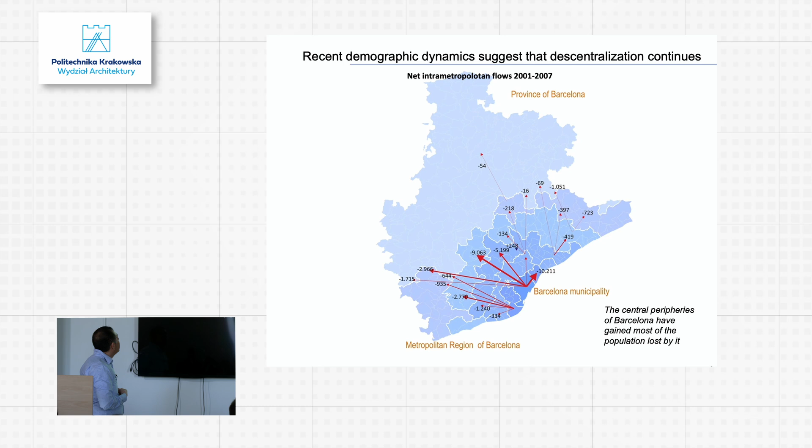And here is how people living in these peripheral areas commute to work in Barcelona. In total, more or less 16 million people move around in a day. That means people living in the metropolitan region move at least 3 times per day — if we have 5 million people living there, at least they move 3 times.

Basically, half of the mobility is produced by walking, namely in the city center and subcenters, while the other part is by public transportation and car traffic systems. Here you have the shares, but the important thing is that the modes of transportation are completely different considering the urban fabric: dense, diverse and mixed in the center, versus the periphery which is low density, monofunctional, and basically served by cars, as you can see here. The ratio shown is the number of people moving by active or public transportation against the private car.

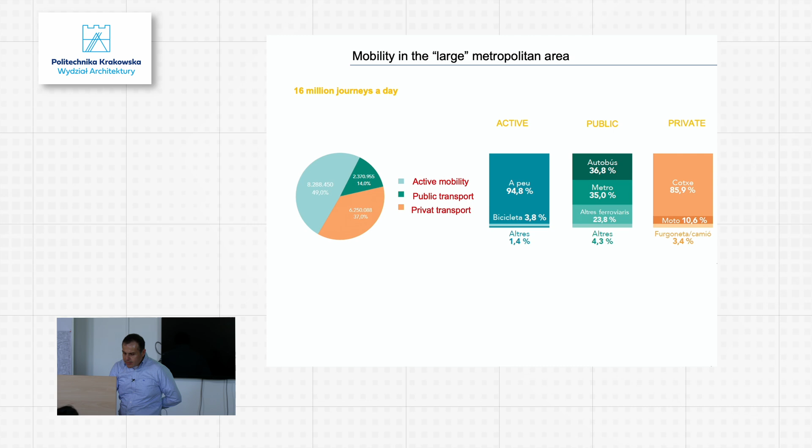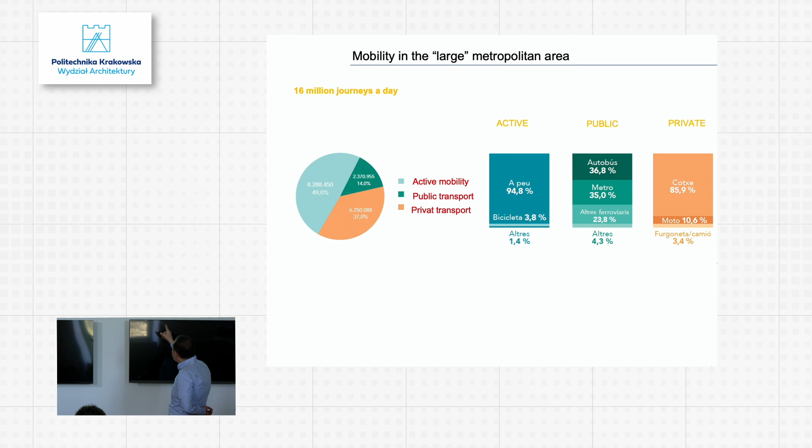The result is that all people living outside of the city but working in the city, despite the share not being too large, collapse the whole urban structure. All the main avenues and highways entering into the city center, the metropolitan center, which is not only the municipality of Barcelona but also the neighboring municipalities at the same level of the sea in a continuous urban fabric, suffer traffic jams. The pollution produced by cars is a large problem within Barcelona.

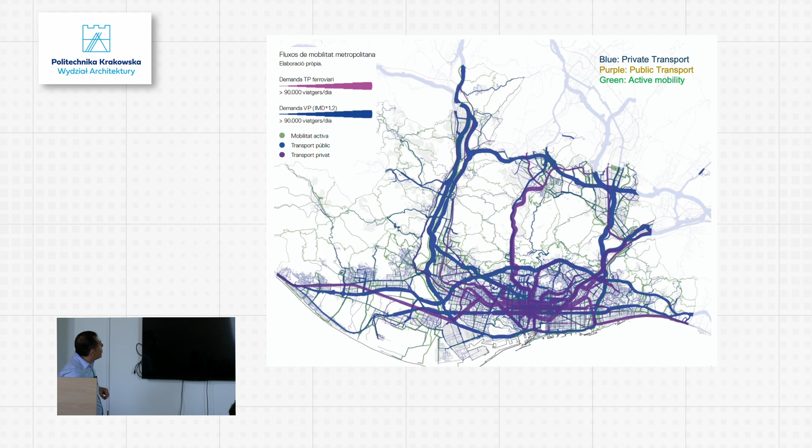Not surprisingly, especially during winter when the air is cold, we have these problems of contamination, and Barcelona is considered one of the most polluted cities, not only in Spain but also in Europe.

Another policy is the introduction of bike lanes over the last 15 years, which has increased the network of bike lanes in the city, and the share of mobility using bikes, but also personal mobility devices such as scooters.

Another policy consists of changing the geometry of the bus network to produce a more orthogonal pattern, which is closely related, as we will learn, to traffic pacification. And of course, integrating the tariff system in the city to allow more easy and attractive mobility, and digitizing everything with information systems.

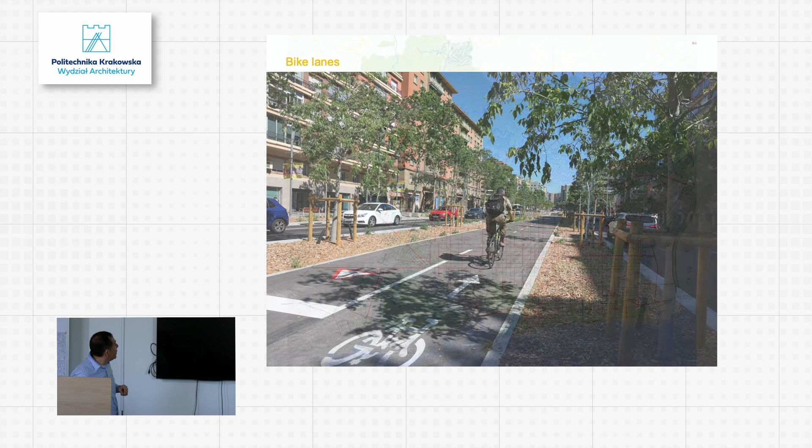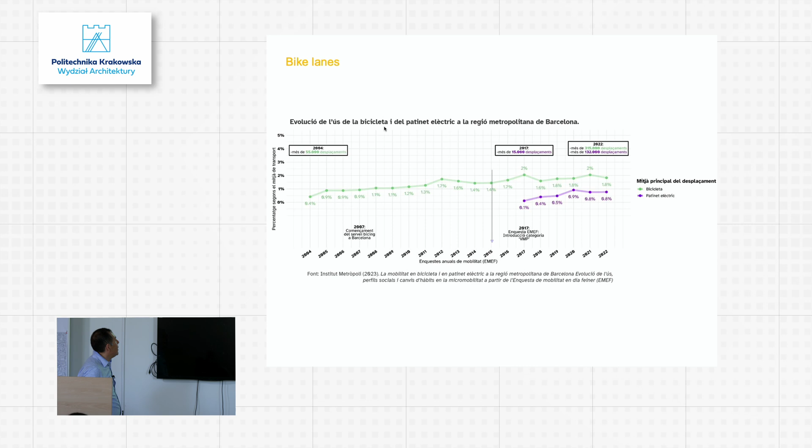So urbanists - well, all those actions are actions by engineers, basically. But urbanists, land planners, city planners, and architects are also contributing to change this situation. Today's lecture focuses precisely on how architects are also helping to transform this terrible situation of a city that is congested by people living outside of it.

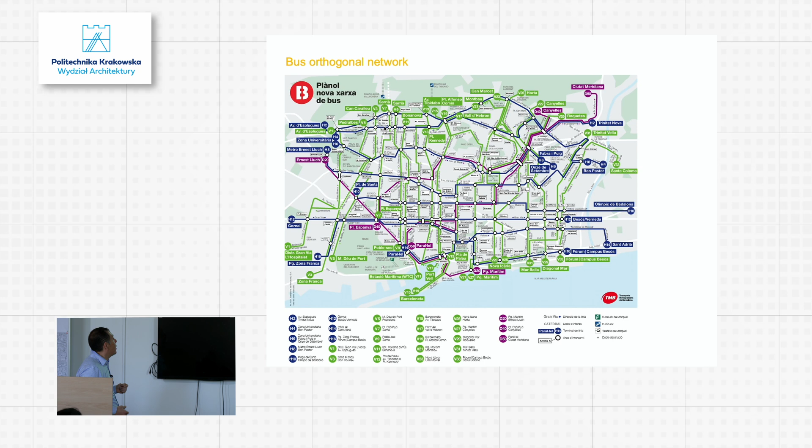People living within the city live in a fantasy, a kind of Disneyland, they can walk. But people coming to work in the city necessarily use the car, because public transportation, as you have learned, is very weak. So we're going to start by remembering where Barcelona is coming from, going through the different policies that urban planners are introducing, and finally pointing out the most important things.

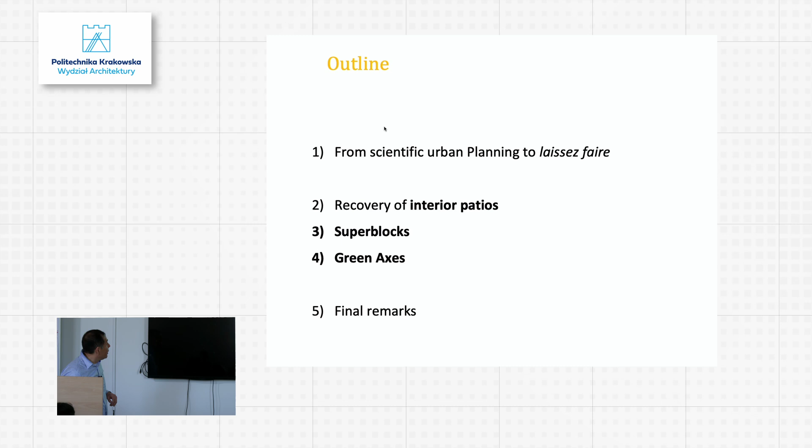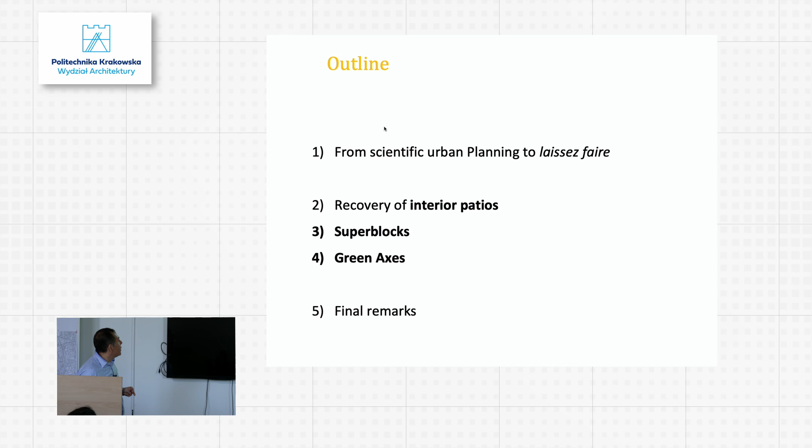Maybe you are aware that Barcelona was one of the first cities planned according to scientific criteria, basically analyzing what was happening in the old walled city in order to design what would happen in the extension of the city during the Industrial Revolution. Ildefons Cerdà, who was not an architect but an engineer, a road engineer, was the author of this enlargement of Barcelona. He analyzed mortality by type of street, basically the width of streets, to put into relation the health condition of people with the health condition according to the buildings.

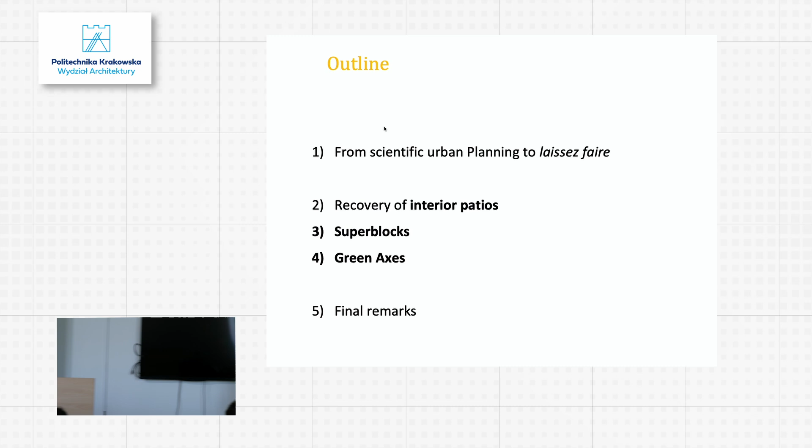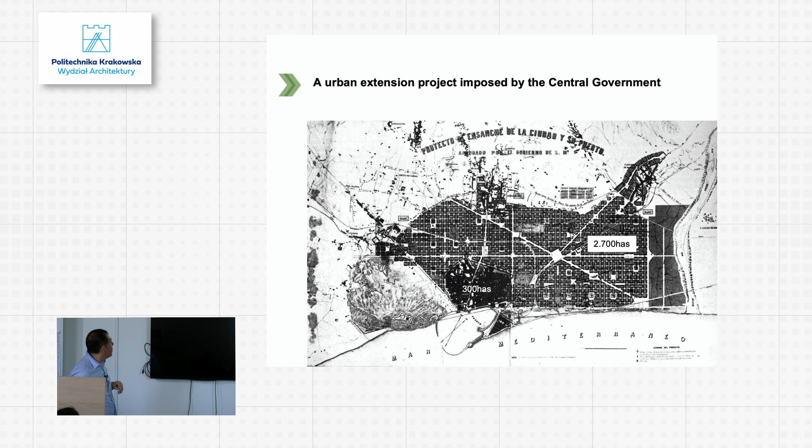Departing from the design of an ideal multifamily home, he designed the block that would be ideal for the city, and also considered that part of the block should be devoted to green spaces that were not necessarily public, but private, containing some orchards and some of what we now call urban agriculture. So not all of them were ornamental.

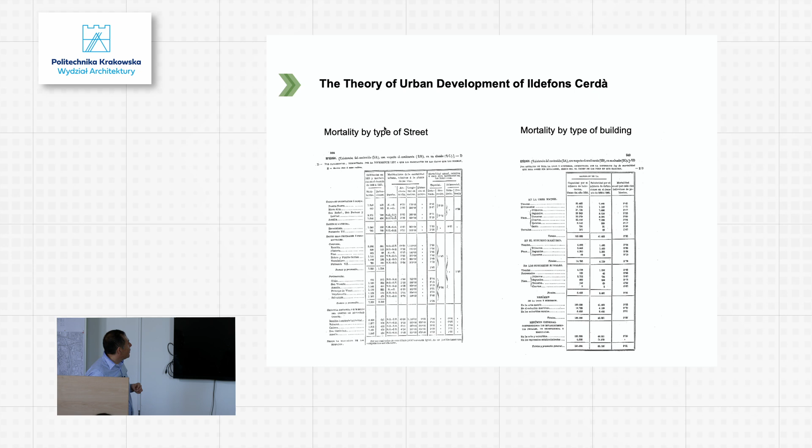The resulting layout from this idea of having such blocks, and devoting most of the private land to greenery, is the image you have here in this reproduction. By having these octagonal blocks, when they match one to the other, it also allows for easing the traffic of road networks.

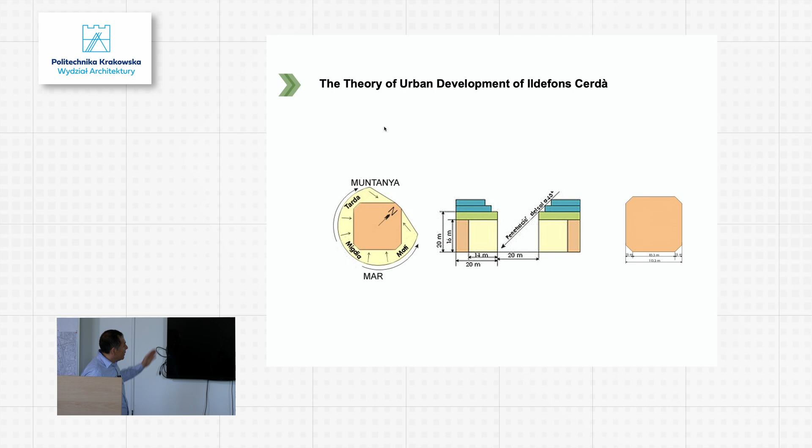Such as railroads or tramways at that time. Despite the tramways not being present before Barcelona was enlarged, the new fabric would allow them to circulate easily, and later, of course, the cars.

He figured out that at the center of these crossing points there would be some services, for example police stations, information stations, or kiosks to provide services to people. More or less, the image resulting from such ideas was this.

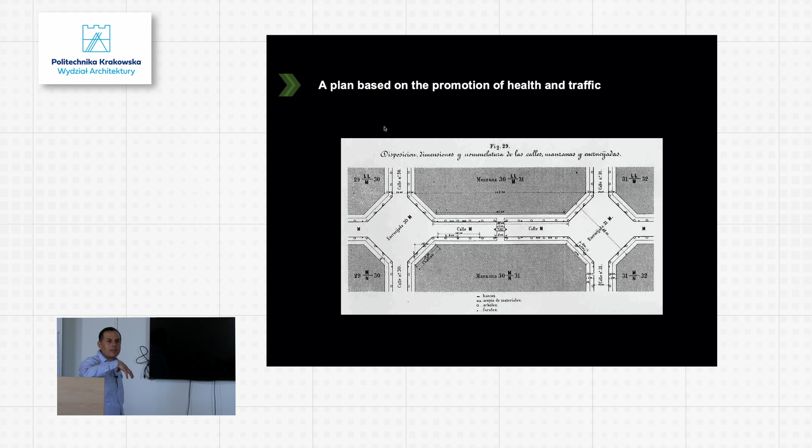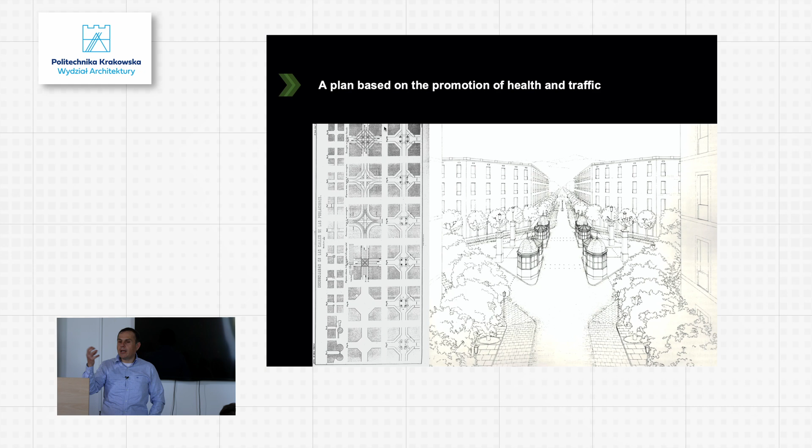Considering that Barcelona became a wealthy economic area since industrialization was happening, people from manufacturing industries were investing money in the real estate sector. The real estate sector was a new business, non-existent before in Barcelona, but it attracted capital from the revenues coming from the manufacturing area, and those revenues were used to build such heritage buildings.

However, it lasted only 80 years or less, because Spain entered into a civil conflict that produced a complete stagnation not only of Barcelona but the entire country. This industrial booming, which was occurring not only in Barcelona but also in other large Spanish cities, stopped.

The economy of Europe continued to grow, especially with the Marshall Plan, while the economy of Spain stagnated. So a kind of gap emerged. During that time, during what I call the dictatorial abyss, some of the regulations that were shaping the growth of Barcelona were relaxed.

However, in the 60s, Franco realized that Spain had to come again into the global economy at that time. So he produced a kind of stabilization plan to attract new, foreign investments, and it worked. So what happened is that the cities started to grow again. Here you have the growth of Barcelona.

This is the city of Barcelona, and this is the distance to the city of Barcelona. What you have here is the growth of population in time lapses of 10 years. You can see here this blue line, which is what happened between the 60s and the 75. That means a lot of people from other parts of Spain, namely the south, but also the center of Spain, came to live in the city.

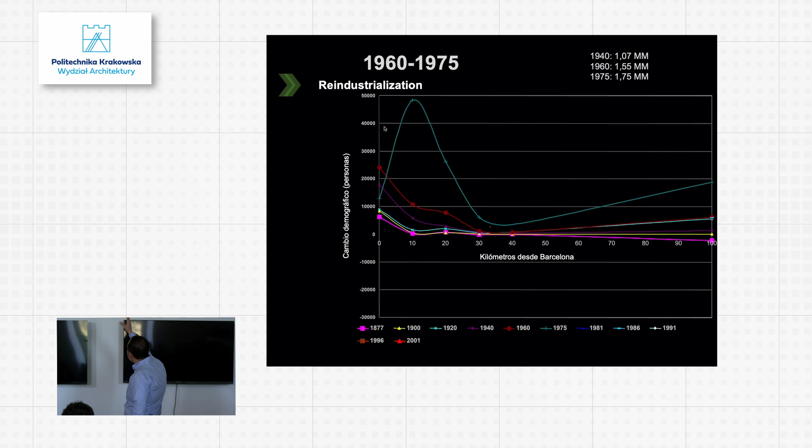Of course, the ensanche, the eixample of Cerdà, was not enough to provide housing for those people. So what happened is that under this laissez-faire approach from the dictatorial land management, it was allowed to grow the width of the buildings, to build on the four facades of the block, and also to construct new stories, as you can see here.

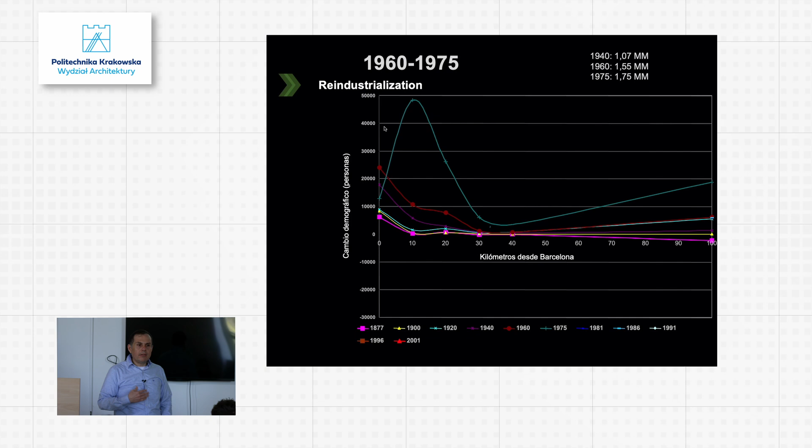At the end of the day, the built area grew more or less 5 times. So this paradise that Cerdà designed completely disappeared, and the result looks like this: a completely congested area with very, very poor greenery. Only some large parks remain, and the rest are basically streets with trees.

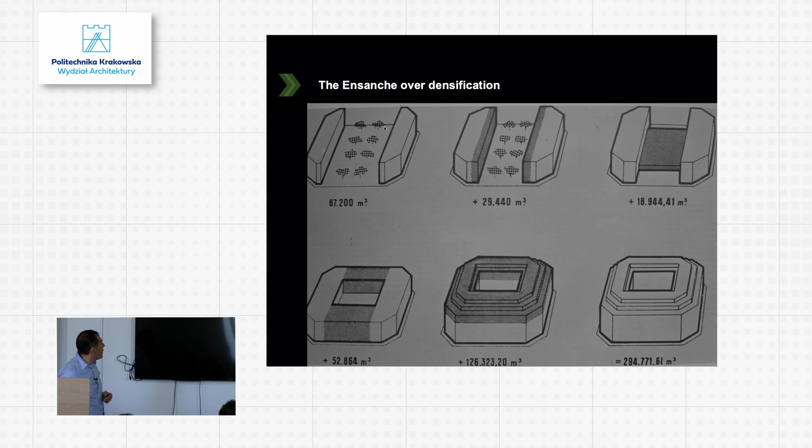However, not only was the Eixample built up, but also the peripheral areas, where the central government built housing estates that were in the middle of fields, completely disconnected from the cities, from the city center, from the main roads, and even lacking public space, facilities, and any kind of amenities.

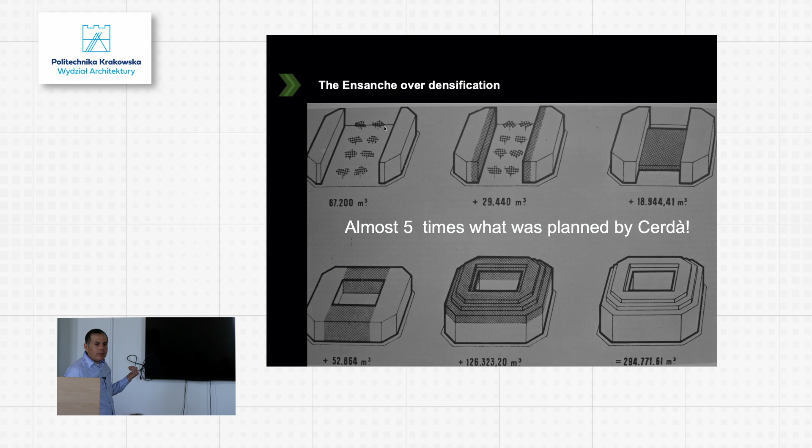So this Barcelona from modernism became something really different, and even shanties appeared on the outskirts of the city and even on the beaches.

This changed as Franco died, as the new democratic governments, namely the municipal governments, came to take control of the situation. Pascual Maragall, the city mayor of Barcelona, had the ambition to transform the city by attracting the Olympic Games. At that time, Spain was joining the European Union.

So it was the opportunity to join the power of the city with money coming from the European Union and also from the central government, because the politicians were aligned on the same, let's say, left-hand governments. The idea was to take advantage of the Olympic Games to transform the city, to refurbish the city center that was pretty congested, and also to provide an opportunity for the periphery to be integrated into the city.

So basically, taking advantage of the economic crisis that arrived in the mid-80s, they bought land that was private, sometimes derelict factories and manufacturing sites. These were bought by the city council and transformed into different kinds of parks.

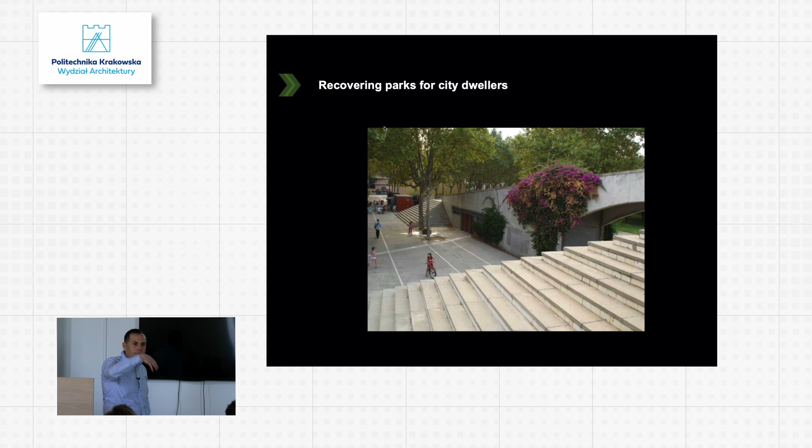First, Catalan migrants from other parts of Catalonia. Second, Spaniards who came to work in Barcelona. Third, foreigners who started to arrive in the 70s and 80s.

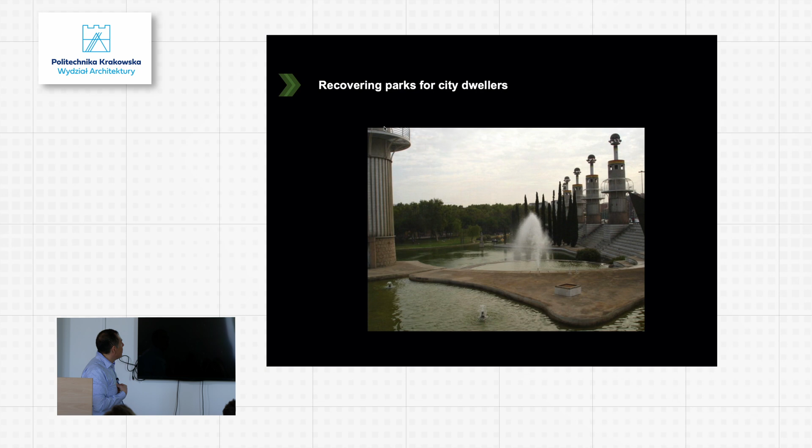So it was a pretty deprived area, and it was also regenerated because normal citizens started to fight to improve their city. This was not the original plan, but it happened according to demonstrations produced by the people.

New centralities also emerged in order to decongest the city. One of the landmarks of this transformation was the recovery of the seafront. Barcelona did not have access to the sea because all manufacturing plants were located along the coast, and basically the access to the sea was only 100 meters.

So what they did was produce a waterfront, remove the shanties, relocate people into social housing being built in other areas, and also produce artificial beaches. The construction of ports along the Catalan coast changed the flows of water, and this eroded the landscape, so all the beaches here in the city are artificial, protected with marine structures.

So for the first time ever, in 1992, when the Olympic Games finished, the city had access to the sea and new large public spaces that had not existed until that time.

However, after this success of the central city, the economy of Barcelona started to change. The manufacturing sector was moving to China and other places, on one hand. On the other, Barcelona became a touristic city. So what happened with this touristification is that home prices started to rise, and this decentralization of population to the outskirts started to emerge, producing the first images I explained.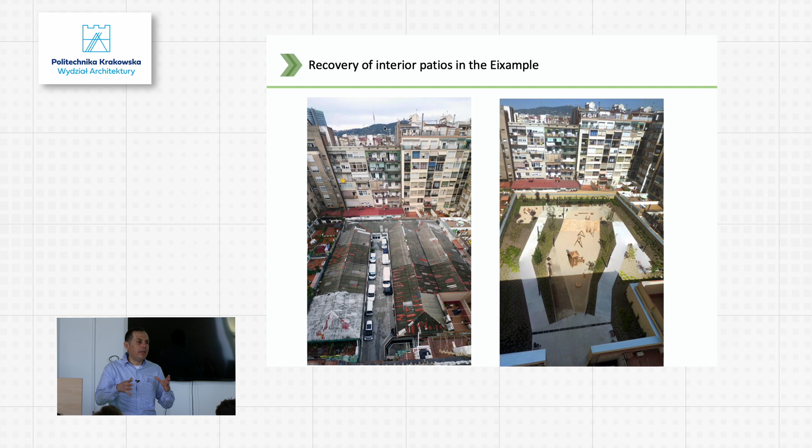The superblocks idea is not a new one in Barcelona because somehow since the 70s, when they started to recover the area across and along the cathedral and the city center, the idea emerged to produce some islands for pedestrians, areas where basically cars cannot access, only service cars. However, what is new in Barcelona is to produce a massive plan to expand this idea, not only to the places where historical buildings are placed, but to all the city.

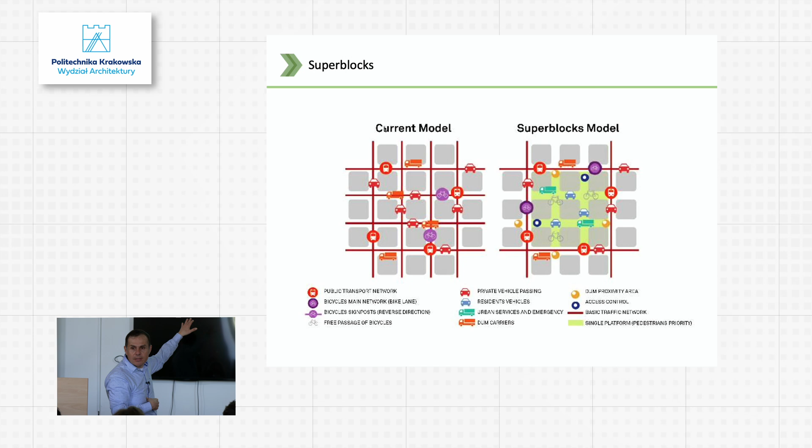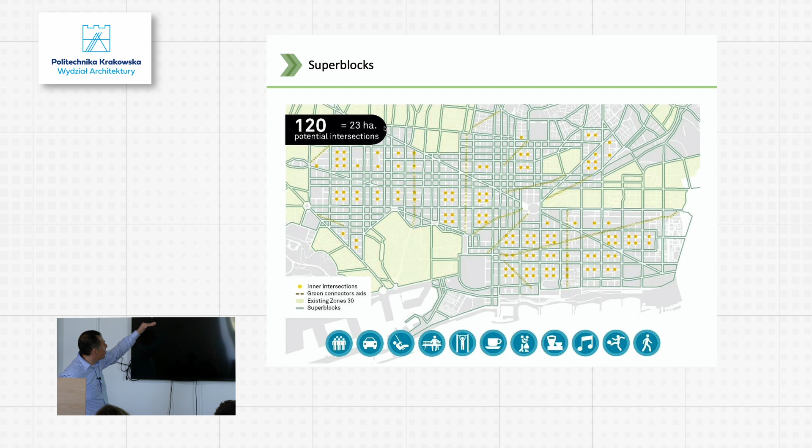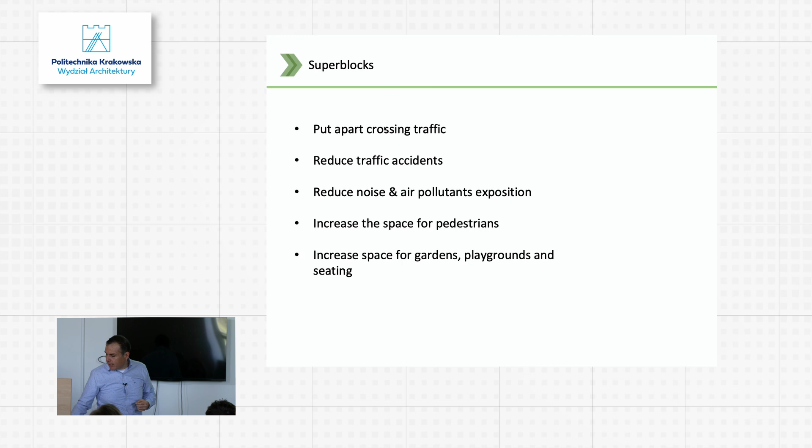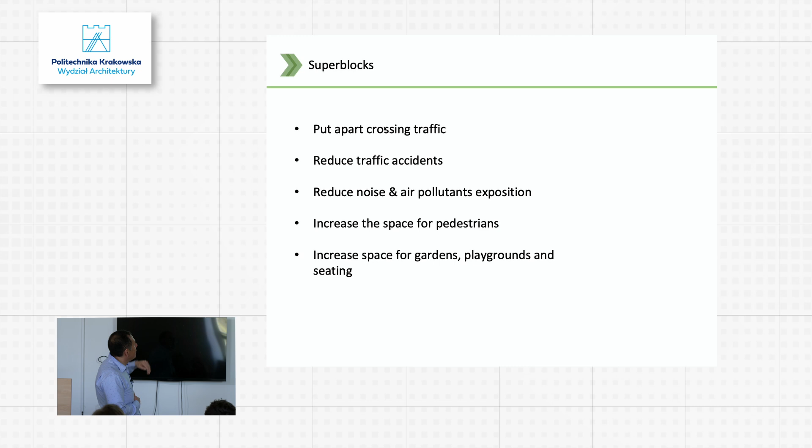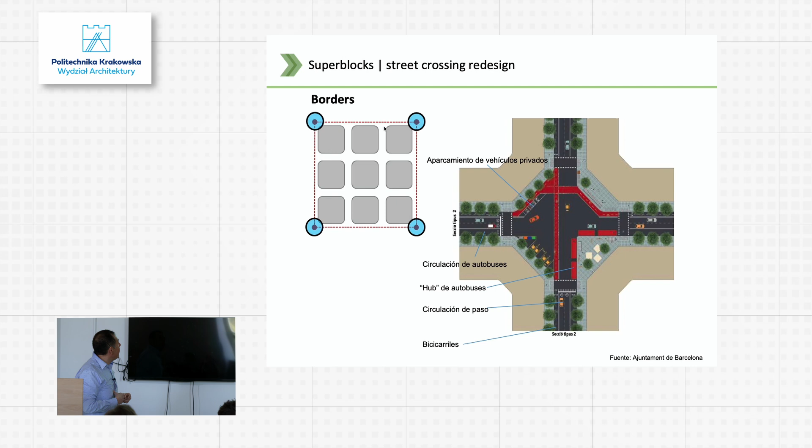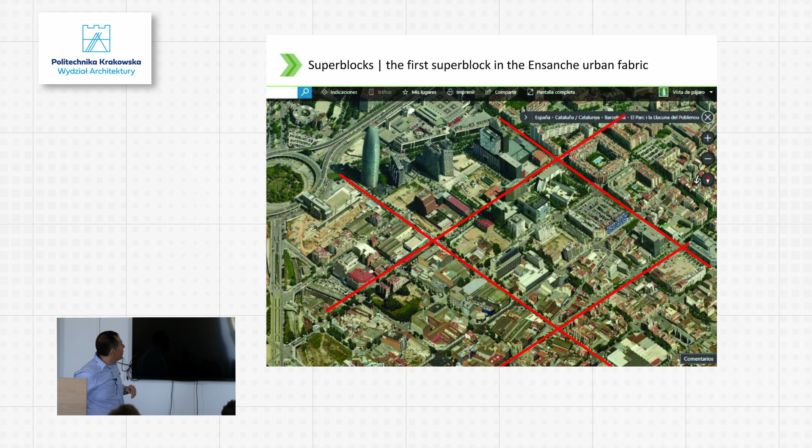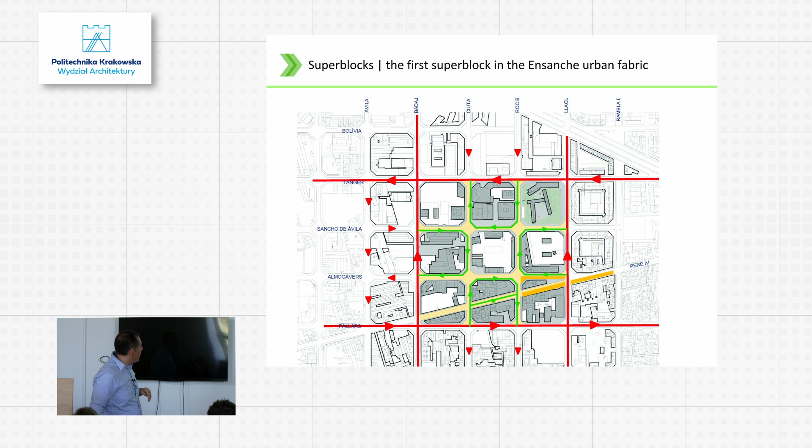And here you have some of the results. Using tactical urbanism, very cheap, they only spent 50,000 euros, which is nothing for the budget of the city. At the end of the day, since they were making experiments and changing furniture, or for example redoing the streets, they totally spent 100,000 euros, the double of the original budget. But anyhow, they saw how the superblock was working.

Interestingly, the people living there protested against this policy. This policy, intended to provide more public space and a more peaceful traffic landscape, was not 100% accepted by the people living there. One of the main reasons was that these people used the car to go to work, and instead of having direct access to the main roads, they had to make a roundabout that perhaps enlarged their journey by 2 minutes, but this was enough to make the people protest against the policy.

But also firms, commercial firms, namely workshops that were very well present in this industrial area, protested against the city council, because they understood that this traffic reorganization would reduce the exposure of their firms to people crossing by, and their revenues would be reduced.

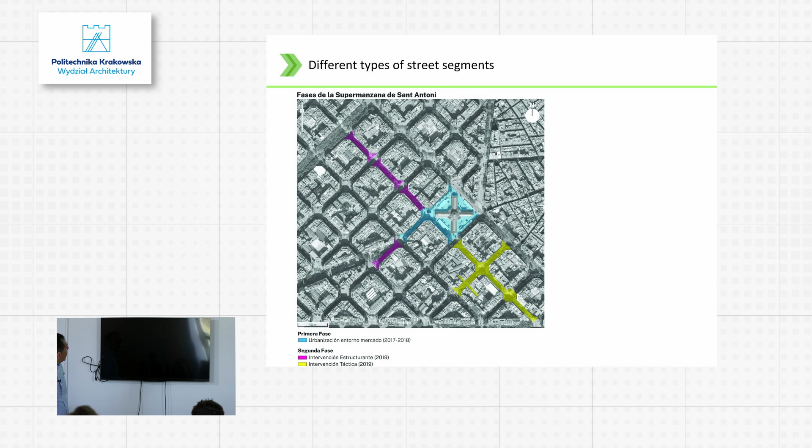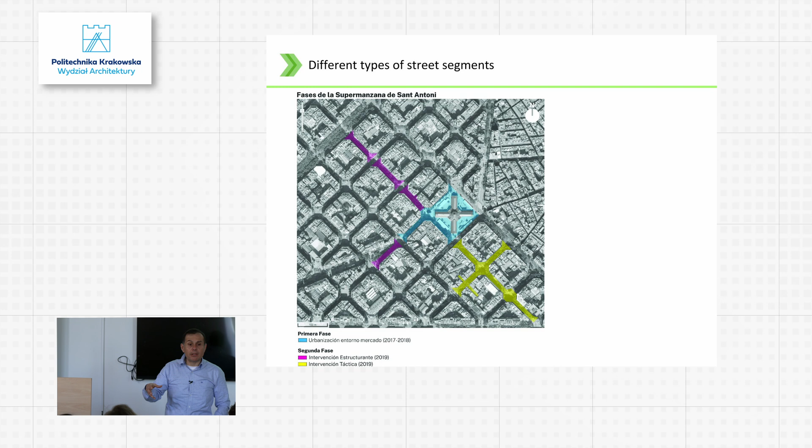Another example of this superblock policy happened in the very heart of the Eixample of Cerdà, the extension of Barcelona, around the neighborhood of Sant Antoni, which has a market. During the 19th century, along Europe, there was a strong movement to provide decentralized markets to European cities, and Barcelona was not the exception, so almost each neighborhood has a market. This market, which is also a landmark, has been recently refurbished. This renewal, one of the first to use the new technology of steel in the city, was taken as an opportunity to also regenerate the area around it.

As you can see here, the streets are almost erased, you don't distinguish which is the area for the cars and which is the area for pedestrians, because it's a unique platform providing uniform access to people and service cars.

The market refurbishment itself is quite interesting, because basically they have enlarged the commercial capacity by constructing a subterranean area, under the ground level. This underground level is the spot for supermarkets. So in the main, historical building, there are some stalls for small shops, where the price is very high and the products are really high quality, while people buy their groceries in the supermarkets downstairs.

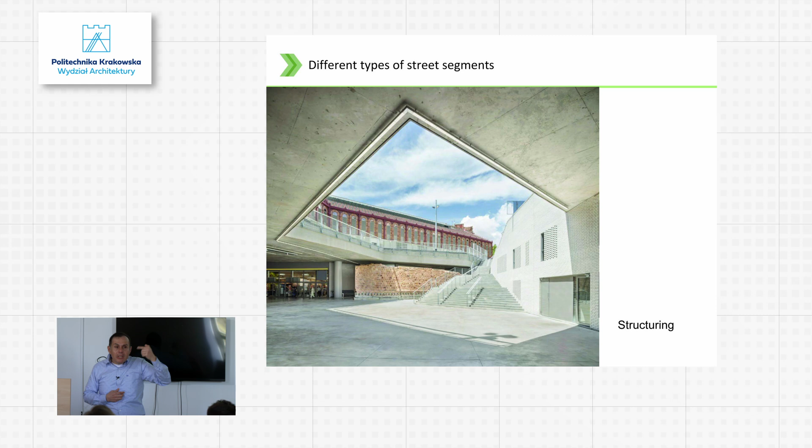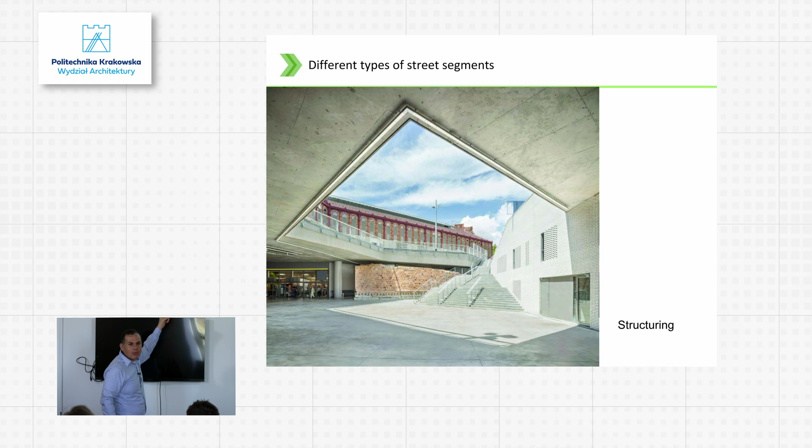But this is a nice intervention, because when they were building this supermarket, in order to get the money to refurbish the heritage building, they had to build this supermarket. When they were building this, they discovered one of the medieval walls of the city, which is now shown here in this image.

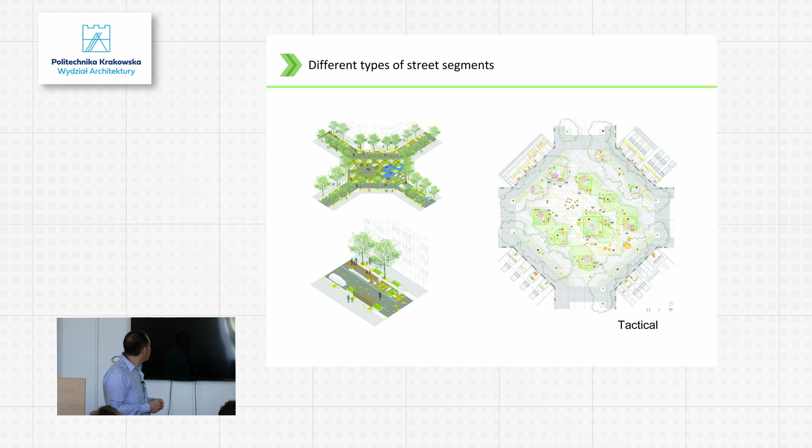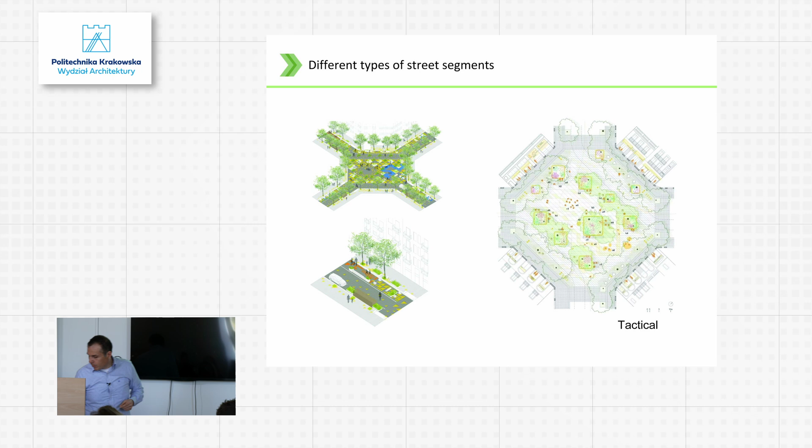The idea of the superblock of Sant Antoni was to produce two kinds of interventions. One that is more hard, where a lot of money was invested to produce a uniform platform with permanent urban design, and the other using tactical urbanism, meaning soft interventions with painting and light furniture that can even be moved, not fixed with concrete. This is the tactical area's original design, and this is the result.

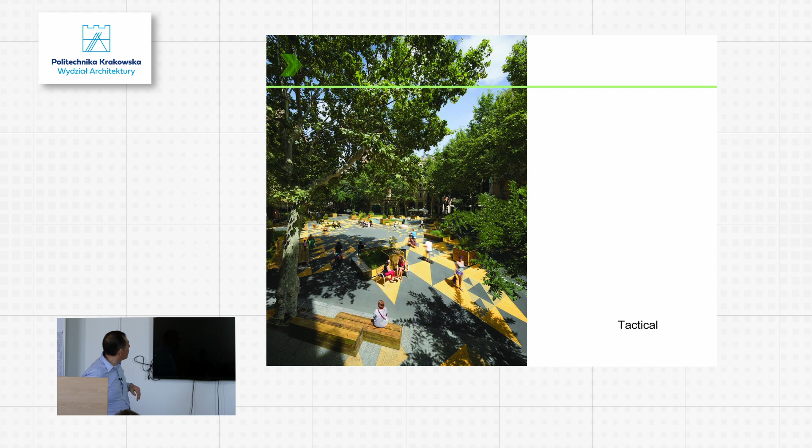This is the center where the original streets were crossing, and it's the spot to sit in the public space, an area for gathering people. Those tables allow people to play, smoke, or drink, since this is also a low-cost drinking area. In the groceries around, students basically buy the beer, then come here and pay half of what they'd pay in the bars, which of course has populated the area.

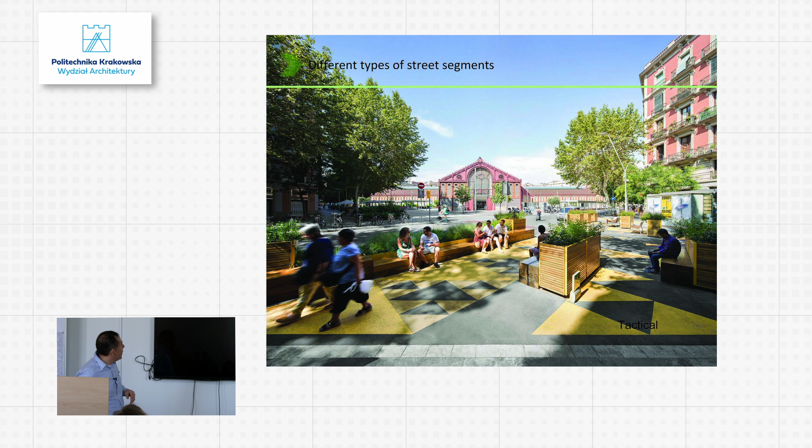Here you have another image. In this area, the people—because we have surveyed those living around here—are not 100% happy. Why?

Because of three facts. First, this is a really attractive area, so people from other neighborhoods come here to use the public space, and local residents aren't happy having strangers in their place. Secondly, they feel it pollutes the space and makes noise—when people chat in public, especially in Spain where we speak loudly, neighbors feel their peace is disrupted.

Thirdly, very fancy, nice bars have appeared, but they're displacing the local shops. Traditional shops can't pay the rent that bars can afford, so there's a kind of gentrification of the business at ground level. For those reasons, people are not happy.

But also they're not happy because those benches are used by homeless people at night—this becomes a place where they can come and sleep. So people now have new activities that weren't present originally, which is quite amazing given the original quality of the public space.

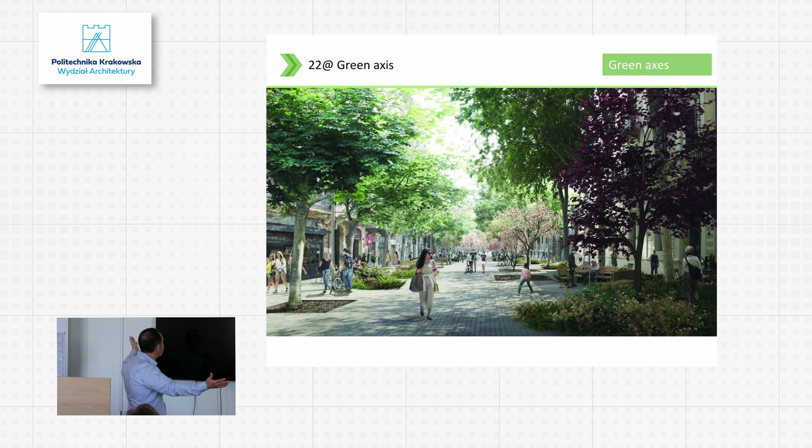Secondly, we introduce hard urbanism—urban design to create new greenery, plant new trees, and create circulation areas for people, along with small islands where people can sit, gather, and meet. This also allows businesses to extend into the public space—shops can put out stalls, groceries and fruit shops can display goods, and bars can set up tables, creating a more permeable, porous interface between private and public space.

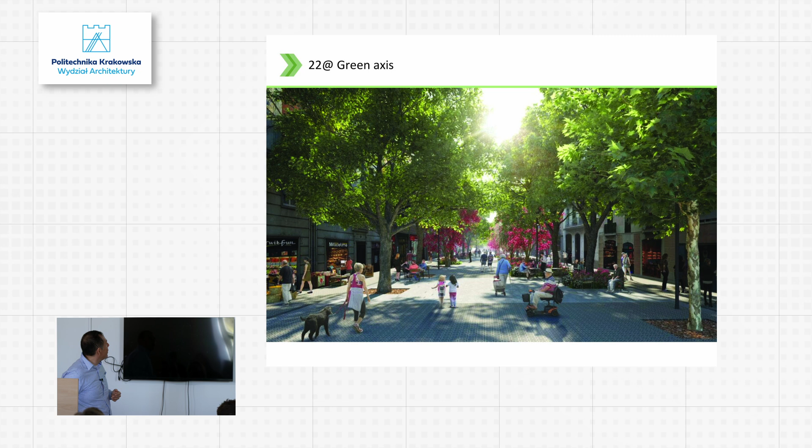These were the projects shown to citizens in order to avoid protests before implementation. Here you have some designs from landscape architects providing three-dimensional renderings—the grass shown isn't real grass, of course, since we don't have the water for it.

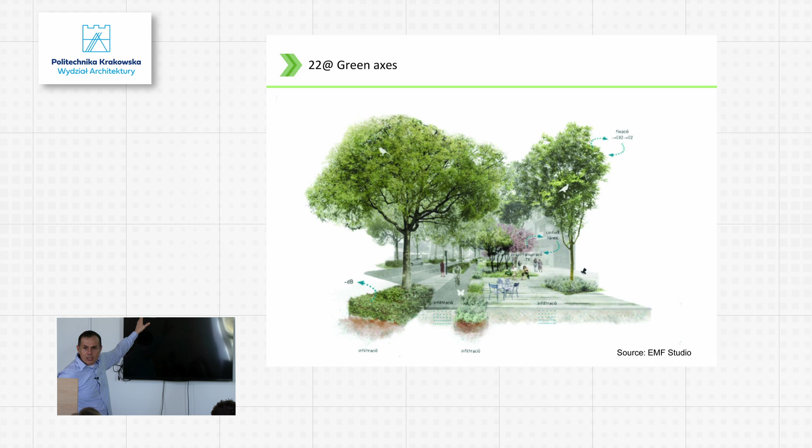Those are some herbs from the Mediterranean region, some bushes, and finally the canopy that is really important during summer because of climate change and the heat island effect I showed before. So here you have the design in these 3 levels.

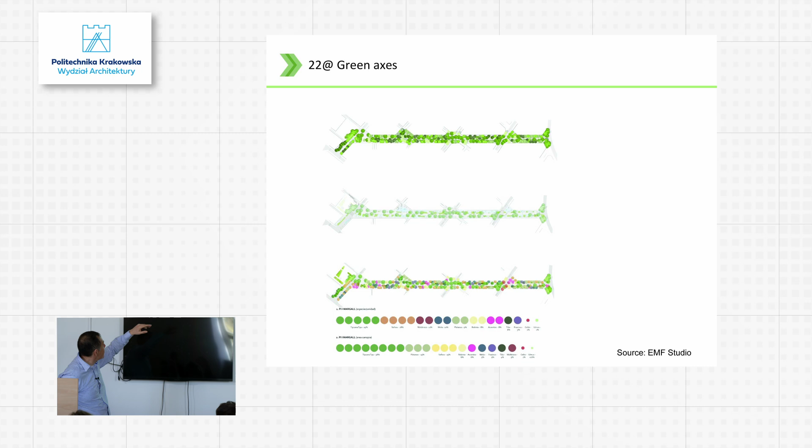Here is the color with the flowers. Here are the bushes. These provide intimacy in areas for people to gather, and protection from the sun. That's the 3rd layer.

The idea of this new greenery that was implemented is to provide what they call environmental services. Not only to have a beautiful, comfortable landscape, but also plants that can absorb more CO2, provide environment for birds to reproduce and insects to recolonize the city, and allow the small amount of water during the rainy season to be absorbed into the city.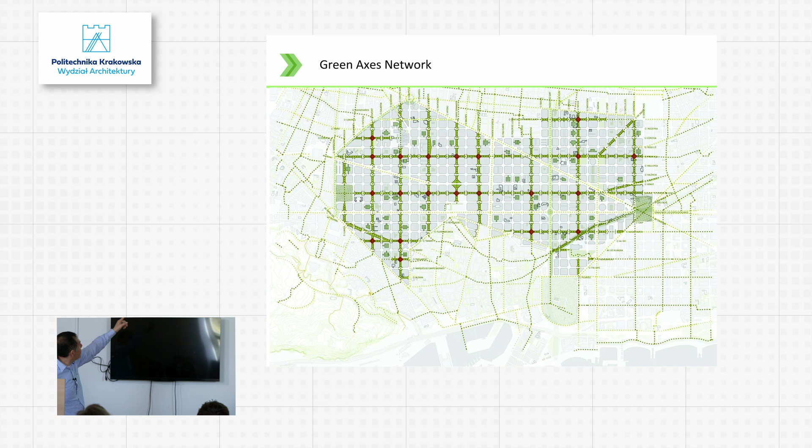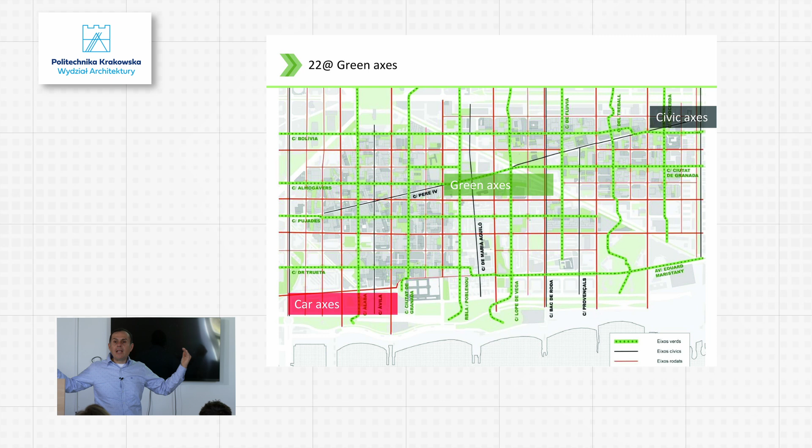So here you have the idea to produce this green axis along the Eixample of Cerdà, and the same in the 22@ area. Basically the idea is to connect the two rivers at the borders of Barcelona through transversal connections, and also to connect the sea with the mountain, with the greenery we saw at the beginning, the small natural park of Collserola.

Here you have one of the first green axes that was built, and you can see the greenery is somehow organic, not necessarily geometric in shape. The platform, which is at the same level, allows every kind of people or children to move around.

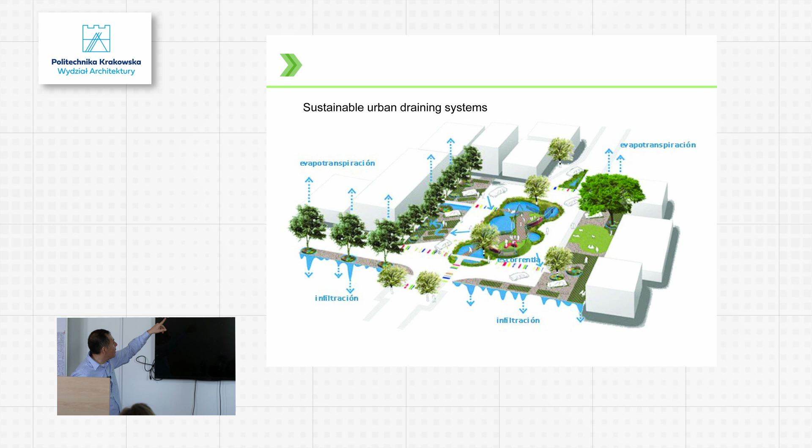The idea of these sustainable urban drainage systems is that they're completely dry during the year, and when the rainy season comes, they become pots where water can be absorbed slowly. They also provide spaces for children to play, with plants that are native to the Mediterranean region.

Nothing to do with grass and that kind of already outdated landscaping that was common in the past.

One of the most iconic super axes is Consell de Cent, running just in the center of the Eixample of Cerdà. Here you have different images from different sections.

The departing point, or not exactly the departing point, but where public tactical urbanism arrived during COVID, and now how it looks, again with this idea of having a space to stay, a space to circulate, and a space for cars to access.

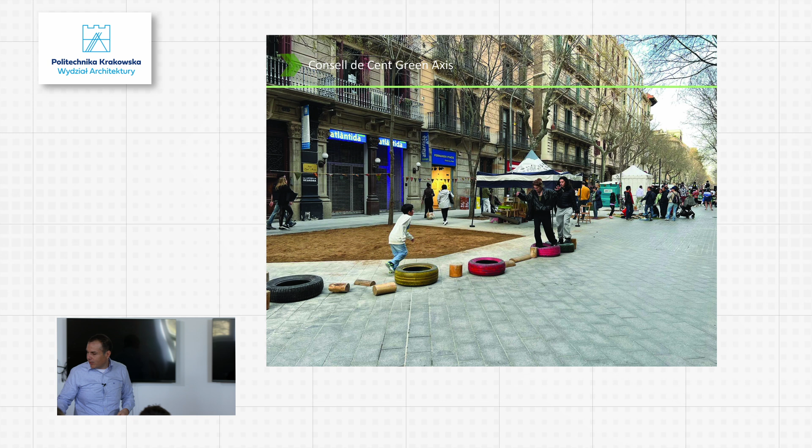Here is the inaugural day. Of course, you can see there are no plants yet, because politicians are pretty interested in inaugurating the public space even when it isn't finished. So it was not finished when it was inaugurated. But here you have the opening day with many activities happening in this area.

More finished images of what happens here during summer, during winter, at night as well. So this area, which was basically very boring because only cars went through and it wasn't a commercial axis, has become a vibrant axis.

The effect on the housing market is that the rental market has started to grow. Real estate agents say that as the axis was announced, prices escalated 20% in the neighboring flats. So tenants, of course, are not happy, but perhaps property owners not living there but leasing their property are happy.

So this idea of looking at which streets can be transformed into more pedestrian-friendly spaces, with different schemes, is pretty well expanded throughout Barcelona.

For example, the Meridiana Avenue was the highway formerly connecting Barcelona with France, and later with the metropolitan area. You can see a normal, traffic-dominated avenue, almost a road, not even really a street.

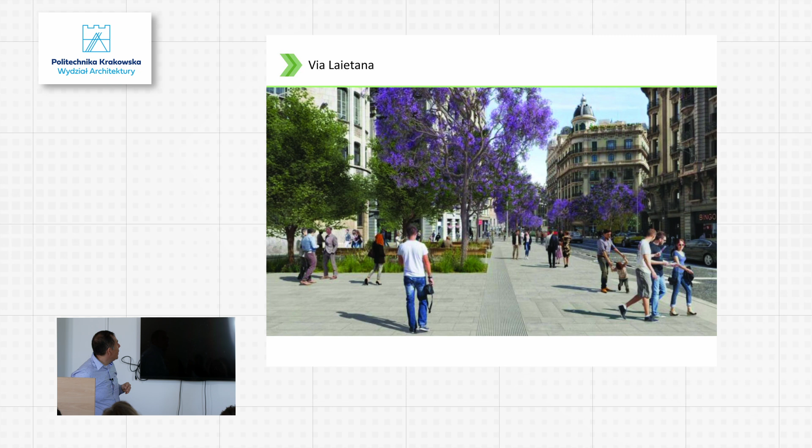The Via Laietana was the opening area following the Haussmann idea to restructure the medieval city in the 19th century. It's now being renovated, again with the idea of producing a single platform to allow people to cross from one part of the historical city to the other, with just one lane for private cars and the remainder for public transportation.

What's really important is to separate the bikes from the pedestrians and from the cars. Generally speaking, they cannot coexist. They go at different speeds. People walking react and behave in an erratic way, they even look at others, and it's completely unpredictable for people on a bike or scooter. So it's really important to separate them if we want to use the bike as a transport system, not as a leisure system, but as a transport system for the city.

Here you have a neighborhood near the mountain where this street, P. Maragall, has been transformed. Here the circulation of people is not as important as the space to stay, producing a kind of park—not necessarily a Rambla or boulevard, but a kind of island where markets, festivals, and ecological food sales that happen during weekends can occur.

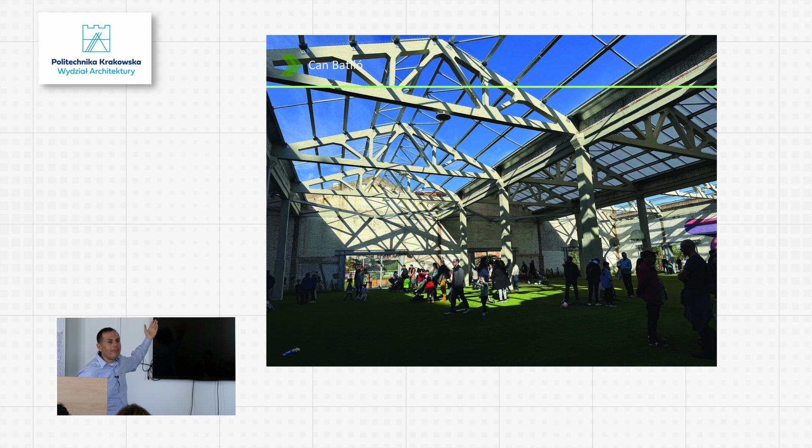Here you have the interior of one of the preserved structures. People didn't want this structure removed, despite it having no architectural or historical value, as you can see. In their memory, it was a plant where perhaps their grandfather was working, so people living around said they wanted to preserve this structure as part of their memory.

And finally, the last neighborhood of Barcelona, the last area being built: La Marina del Prat Vermell, a former manufacturing area next to the port, down near the Olympic area.

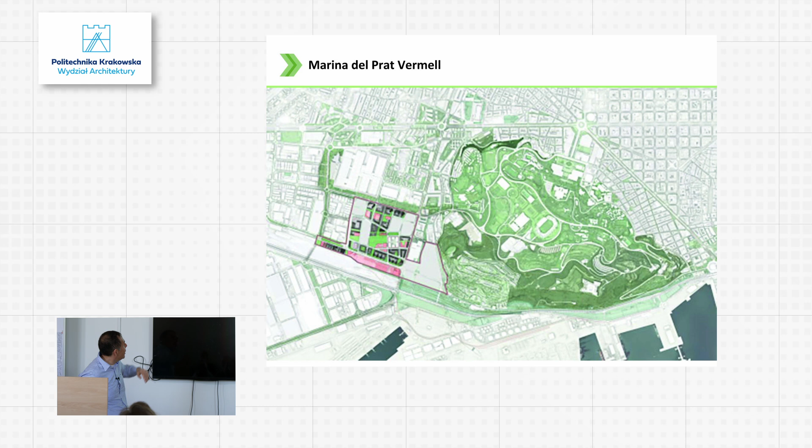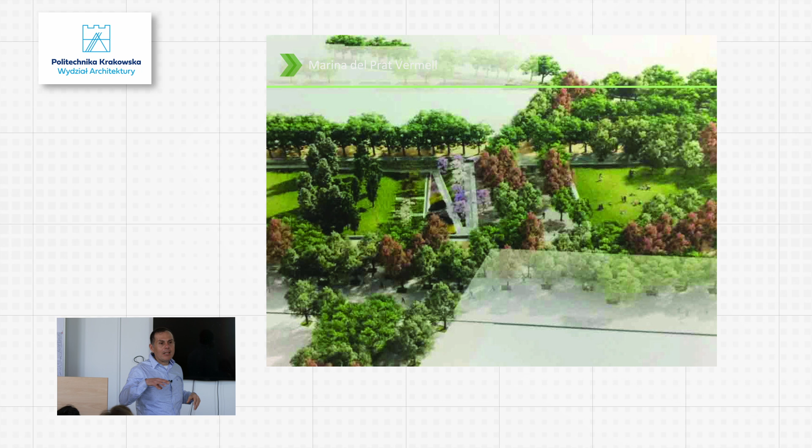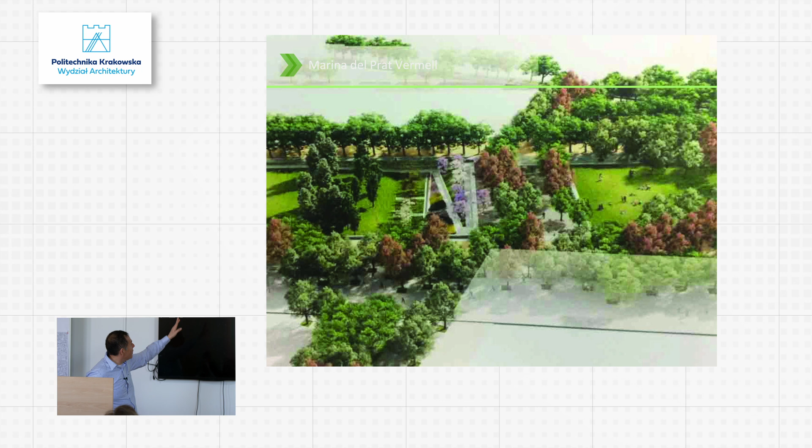And here, again, let's go to say, the greenery is more hectic. There are not boulevards really clear, but it's somehow like chaotic plantation of, let's go to say, 100% natural or regional plants. So basically it's quite different from what is happening. And these herbs are basically wild herbs, not even shaped. This idea to have topiary and these 19th century gardens from England or France is completely erased in this area, and basically everything is happening as in the wild.

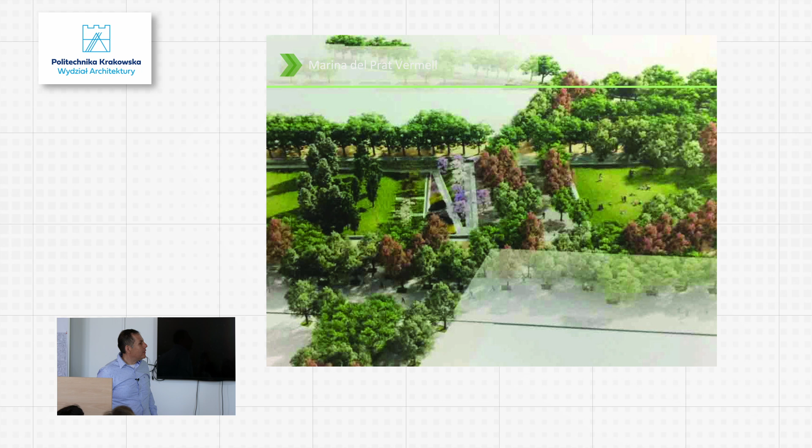So as you can see, we have started to transform the city in a second, let's go to say, post-Olympic era. We have made really small steps, despite that the plans are to expand this network. It has had the problems.

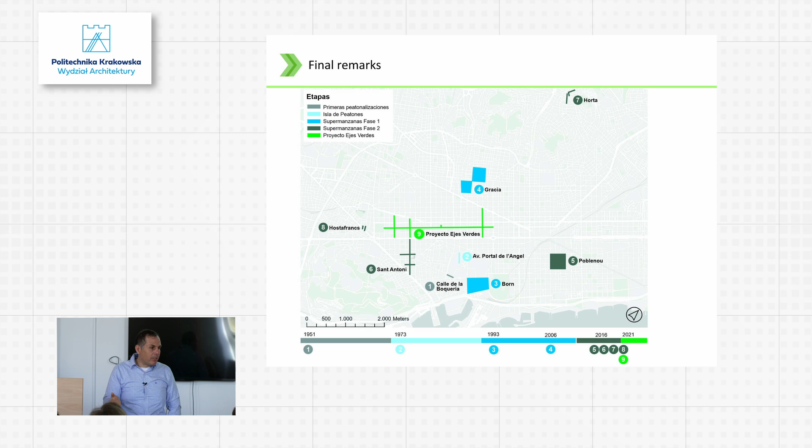For example, the super axis of the Consell de Cent is in the court. The judge, not only one, but 5 judges, said this is illegal. And this is illegal because Ada Colau, the former mayor of Barcelona, who was the lady fostering this idea, built this super axis without going through the proper legal procedure that implies modifying the master plan of Barcelona. This modification will imply at least 5 years, and city mayors in Spain last 4 years. So it was not in her interest to wait for this modification. So the retailers took it to the court, the city council, and the city council asked experts, among us, if it was legal. Of course, it was not. So they have ordered to demolish this green axis.

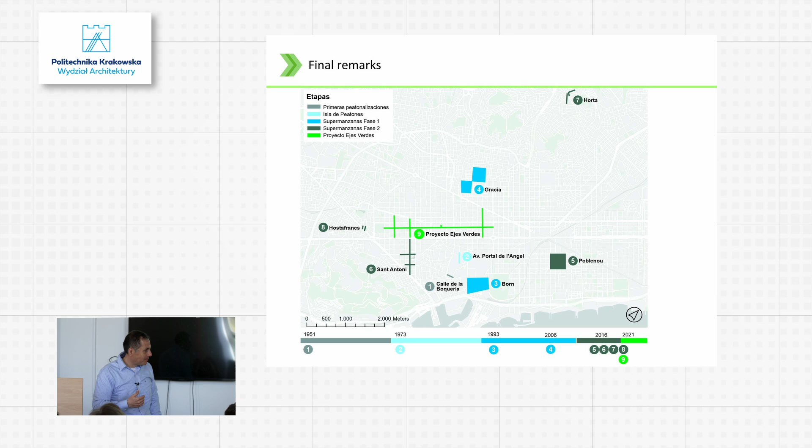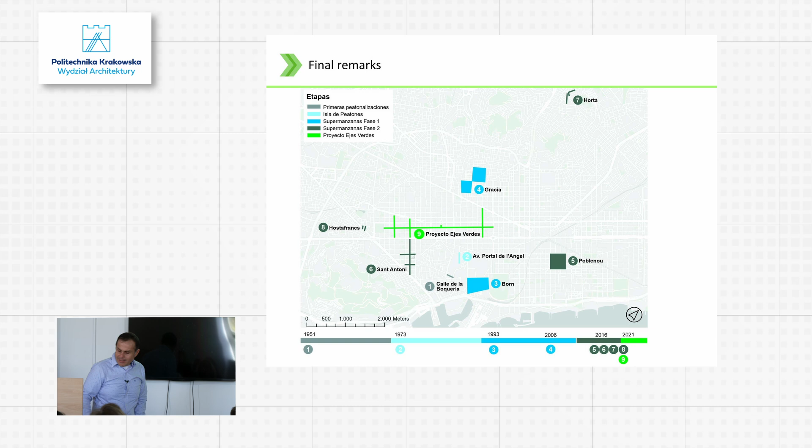The current city mayor of Barcelona has said no more green axes are going to be built. So the plans are, on the one hand, but the reality is much more complex, and we have to take into consideration all these dimensions of urban development, not only the theory, not only the aims, but also where those aims, those ideas, are landing.

The movement for pedestrianization of cities, as you can see, is global. Almost all continents, a large quantity of countries have started to generalize these policies. And these policies are nice because they allow people to walk.

This is really important, and health scientists, physicians, neuroscientists have started to realize that basically most of the current diseases and future diseases related with neurodegenerative processes can be stopped by making exercise. So active mobility, allowing people to move, is a basic thing that cities have to invest in if they want to prevent huge budgetary loads coming from the health system in the future.

It is also nice to revitalize the areas, to provide new, vibrant opportunities. But they have to be accompanied with public policies to avoid the gentrification of businesses. We have not only to think of public space, but these spaces are also important because apparently they extract social capital — the ties among people that are really important, not only for social cohesion, for people to be at peace between them, but also to foster new campaigns, to foster transformations of the city, and even to promote economic development and innovation.